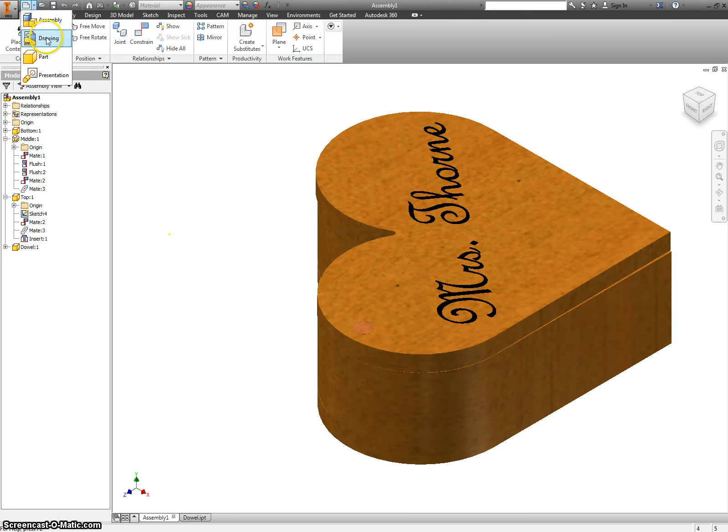Now that we have everything created and assembled, it's time to start making drawings so other people can replicate our work. So click on drawing, and for some reason this always comes in as C size, and no one has C size paper. They have 8.5 by 11 size pieces of paper. So if you right click sheet, edit sheet, 8.5 by 11 is actually A. So change it to A size, 8.5 by 11.

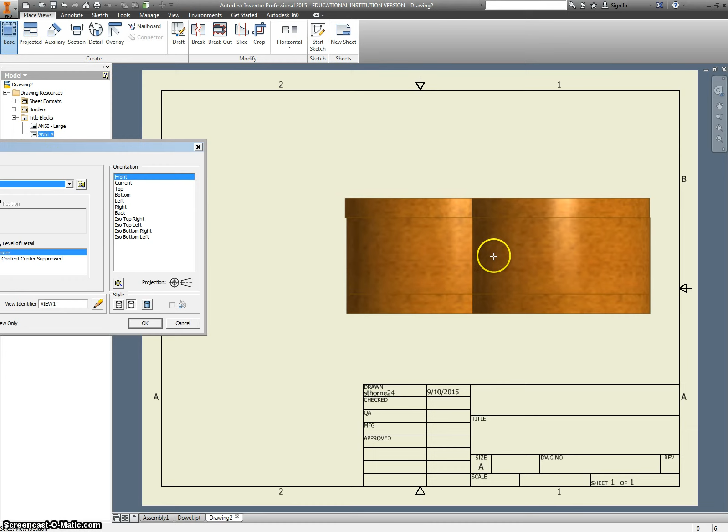Click OK. This is way too big, so we're going to change our ANSI large, delete it, and instead use for title blocks ANSI A. If you double click it, it'll pop in place. Now we're going to go up to base, and the base is going to be what view are we going to see in here. I'm going to go to our little folder, search for the top, click open, and if I just clicked right now, it would put it in place, but I don't want that.

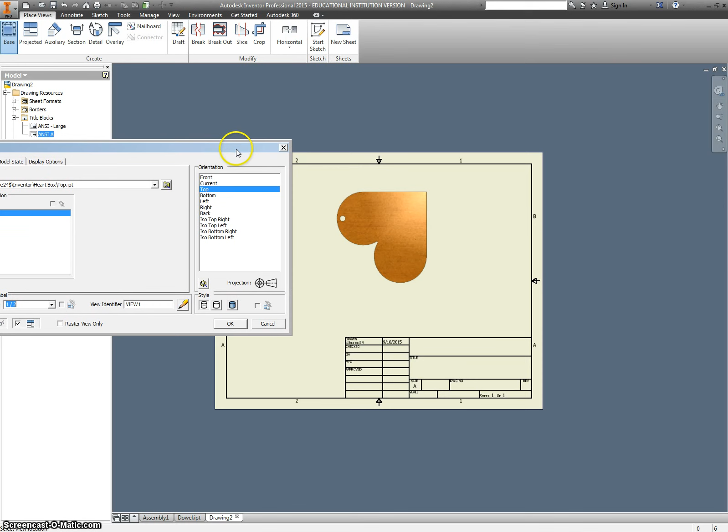So let me switch this to my top view so I can see what this looks like. And this is really big, so let's move this over and we can change the scale here. We'll make it half scale instead. And I don't really like that it's upside down like that. So I think what I'm going to do instead, I'm going to hit cancel. I'm going to go and open up my top view.

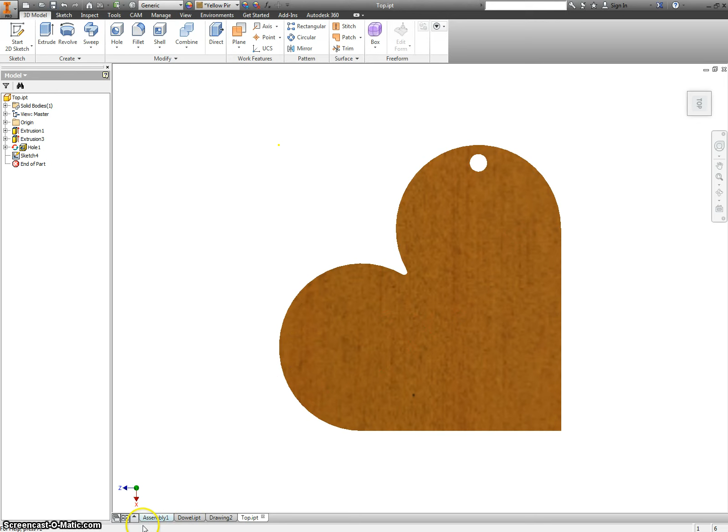And what do I actually want to see when I look at this? That seems the most appropriate, even though that's backwards from Mrs. Thorne. Let's save that. And when I go back into my drawing here, I have the option as my base to put in my current view and still change the scale down to half size. Okay, so there's that. There's the thickness. There's an isometric view so we can see what it should look like.

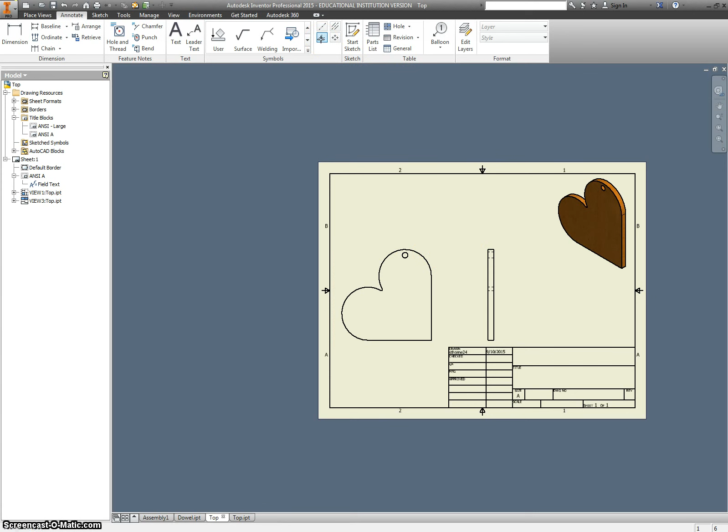We're going to make this one colored, so I'm going to add shading to it. And now we get to dimension this. When you go to dimension, it's under annotate. Annotations are any kind of notes you add to this to make it easier to read. We're going to add in center marks. Anytime you have something that looks like a circle or part of a circle like an arc, you want to put in a center mark. And we're also going to add regular dimensions.

So here is our radius, 1.76, 0.38. This is actually the same radius as this one, so we're going to do something special in a second. Ooh. Oh, you see how I clicked that little green dot? Don't click the dots. Instead, click the lines. When you click a dot, it's actually saying from this point to this point, I want to know that distance. We don't want that. Click when there is no dot.

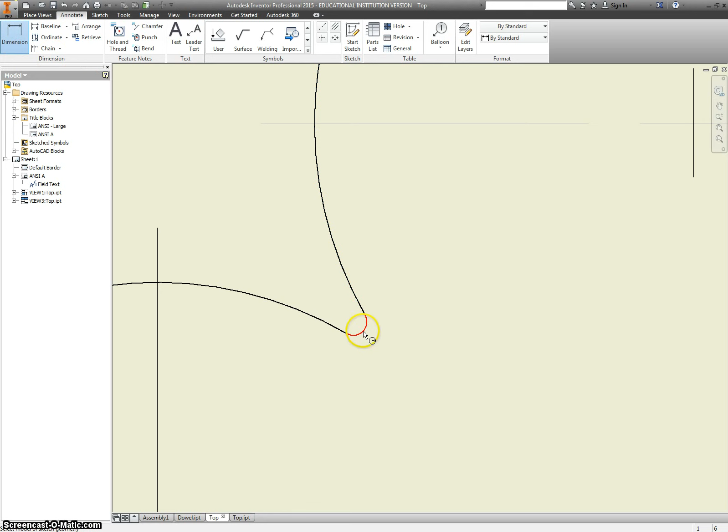Okay, these dimensions all look kind of funny. 0.38, 0.06, 1.76. This is not what we made originally. So right click on one of these dimensions and go to Edit Dimension Style. When this box pops up, we have the option to change the precision. We can change it to 3 places after the decimal instead of 2 places after, and this will make things make a lot more sense.

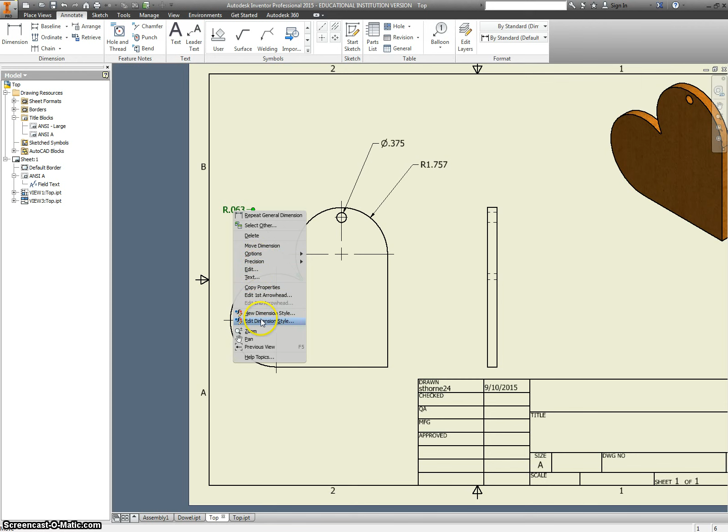So we never did set this radius, we just had a tangent constraint, but this 0.063 is actually 0.0625, so maybe we should go out one more. This is not saying that in woodworking you're going out to the thousandths and ten-thousandths of an inch. It's actually saying that this is a fraction. Okay, so 0.0625, that looks good.

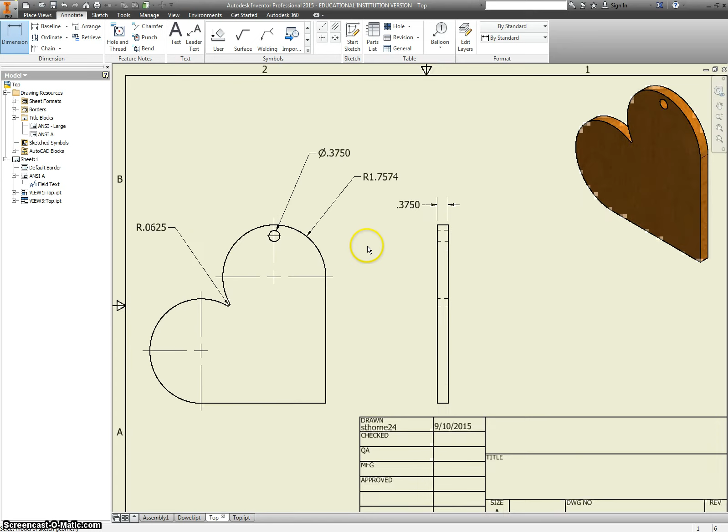0.375, that looks good. We need to know how thick this thing is, so dimension just that piece there. You can just click on the line as long as you don't get one of the little green dots. Again, that's so you can measure from this point to something else. You might want to know how far it is from this edge to this center mark, which is why we put the center mark in. So it's 5.625. Same thing from this edge to this center mark. And you want to kind of stair step them in, so your biggest ones are on the outside and they get smaller as they go in.

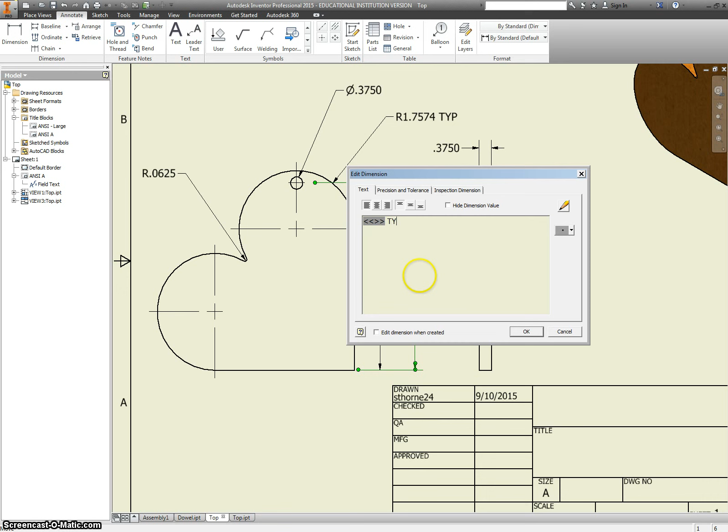Now, this is a symmetrical piece. So if we hit escape a couple times or right click and say OK, we can double click on one of these, like this one, and type TYP, stands for typical. Could also put times 2, but I think typical is more appropriate in this situation. I'll move these over a little bit. You want to try and keep these numbers out from inside here. This is bad practice. Put them on the outside of your shape.

Okay, this is everything we need for the top. So we're going to go up to Views, New Sheet, and everything we just had went away. It's actually right here. I'm going to rename Sheet 1 Top. I'm going to rename Sheet 2 Middle.

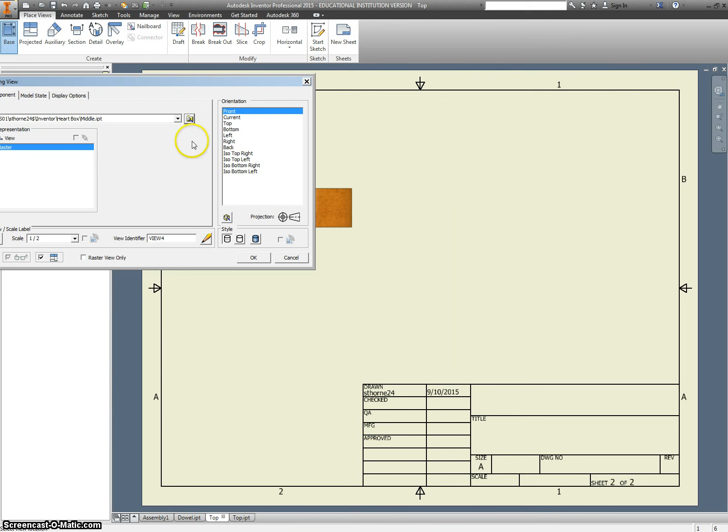The base for middle should be the middle. This is probably going to give us the same kind of issues as before. Should we care about that? Maybe not.

If you wish to rotate this around, now you know how. In the interest of saving time on the video, I'm not going to do that.

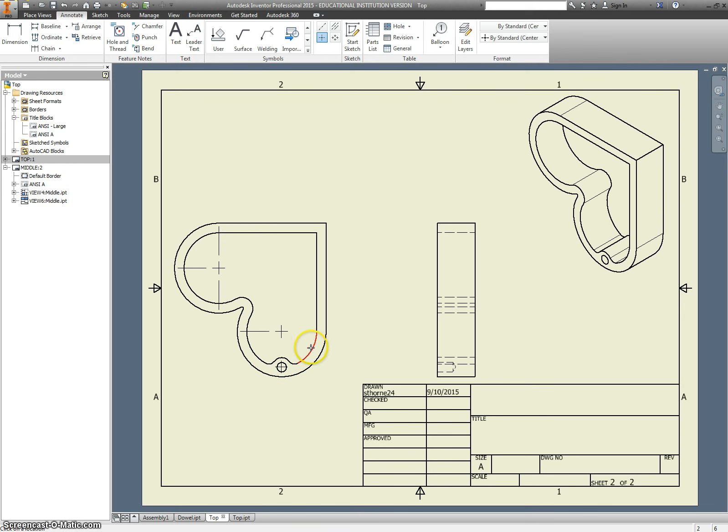We want to show where our center marks are. I'm going to click on both sides of this so I can get center marks all the way around. And this is a hole.

We have to do something special whenever we dimension holes. Instead of just dimension, you have one here labeled hole and thread. Click on that, click on the hole we made, and check that out. It has a depth of 0.625 here for you, and 0.375 is the diameter. This symbol means that from this edge to this edge, see the little circle, edge to edge, it's 0.375.

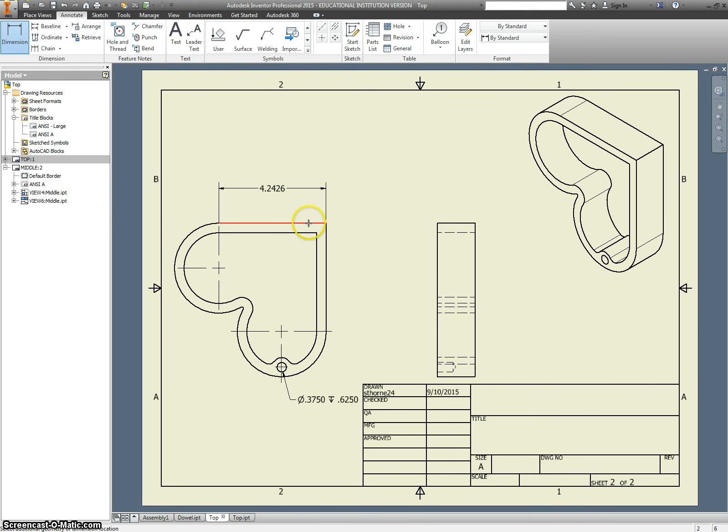Okay, these should look about the same as the ones we had before. This is 0.4 something, or 4 point something. Dimension from here to here is 5.625. We do have a thickness we didn't have before.

So I'm assuming this is my datum, and I'm measuring off of that 0.375. We want to show the thickness here is 1.5.

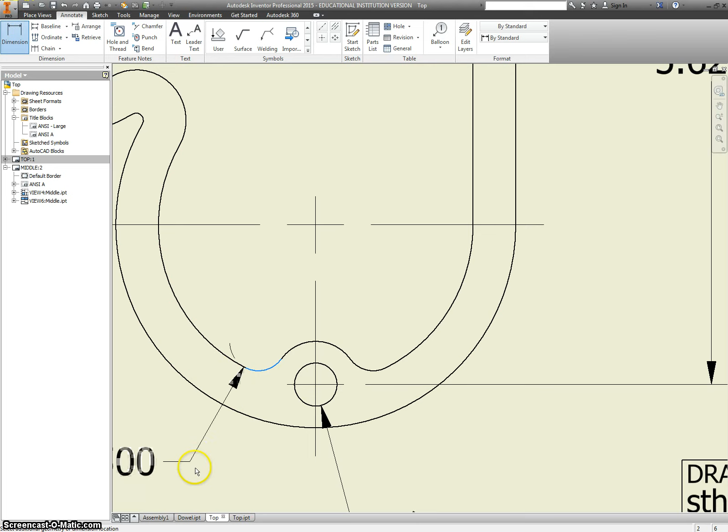And we also need to show what this little radius is here. I missed it, I clicked a green dot. Don't do that. There we go. 0.25 radius. This is the only one that's repeated.

So I'll double click it and say, how about times 2 this time? It means that you have one here and one here, 2 different places on the drawing is what times 2 would mean in this case. You're not multiplying this dimension by 2 ever.

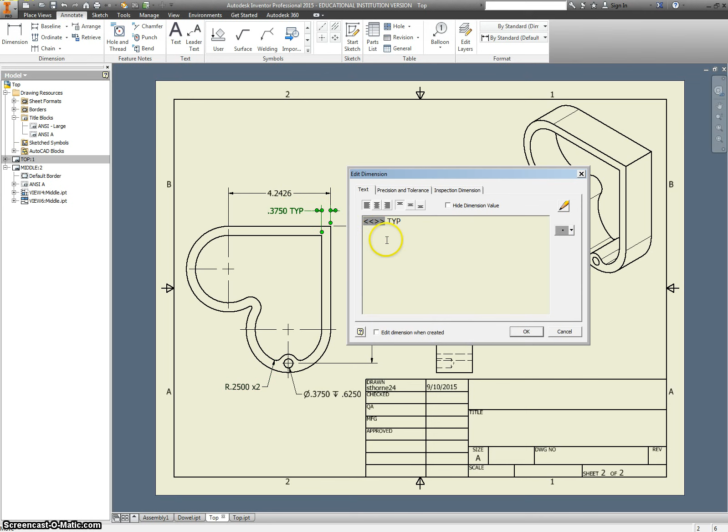This, I'm going to put a TYP after. So that means that the same thickness from here to here is all over the entire drawing. And it is, so that works.

Let me actually go back to the top one real quick. Did we mix something up? Yeah, there's not a hole on this side. So this TYP should not be there, should it?

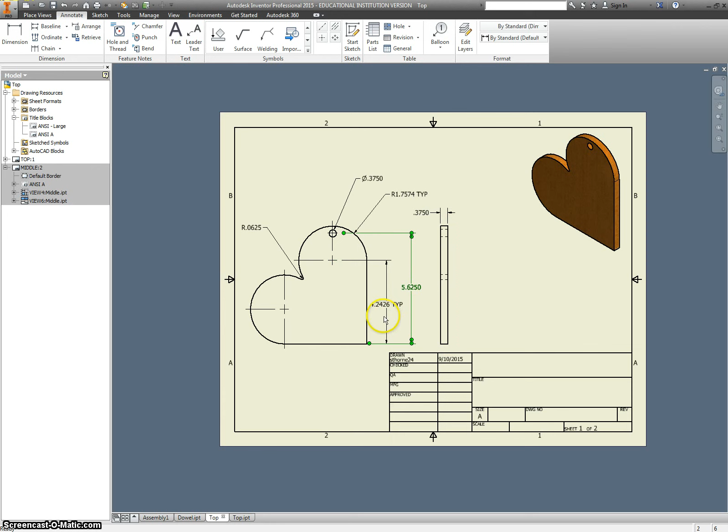That's only if it's a typical dimension. And the only typical thing is how far these are spaced apart. Back to middle.

We can also dimension the outside of this, which we did not have yet. And it's the same as the other ones. Ideally, this is a perfect shape. Double click on this thing on the top right.

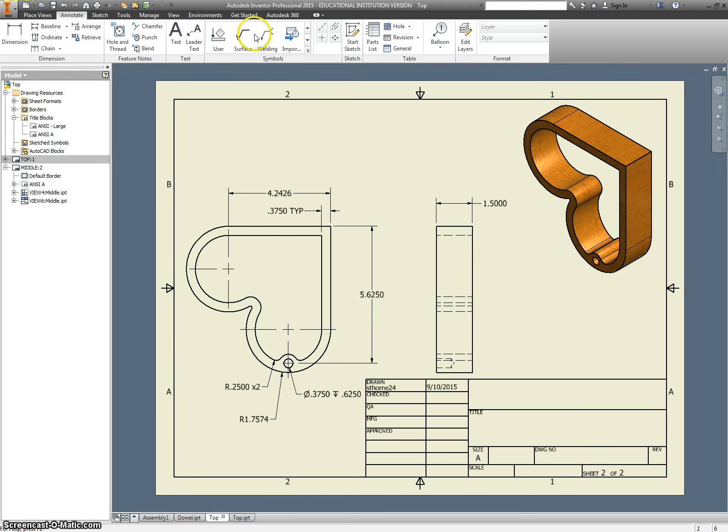Change this to a shaded drawing. And let's go on back to Place Views, New Sheet, and we're going to add in our last one. So Base, Search. Oh, not the last one, we still have a dowel rod to do.

We started with the top, so I guess we're going down to the bottom now.

Oh man, that got really close to that line, didn't it? To move this, you can't just grab and move it, it only moves left and right. You have to move the first one you put in, which in this case is this one here. I can drag that up, I can drag this over.

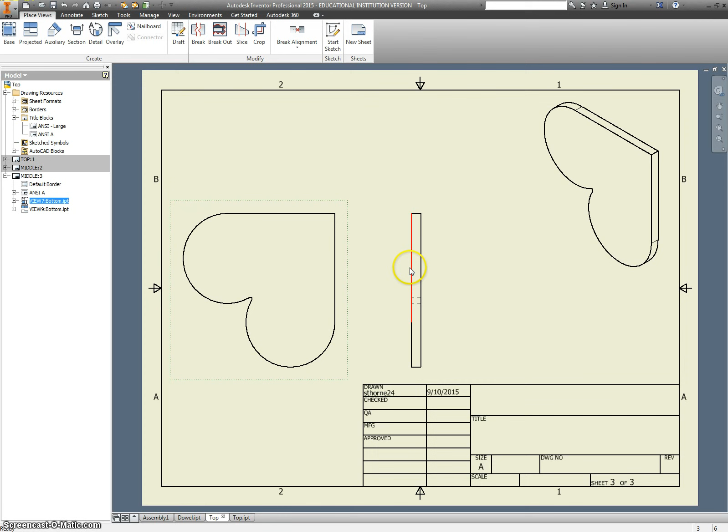These two drawings are always aligned with each other, so that's kind of nice. Double click this, make it shaded.

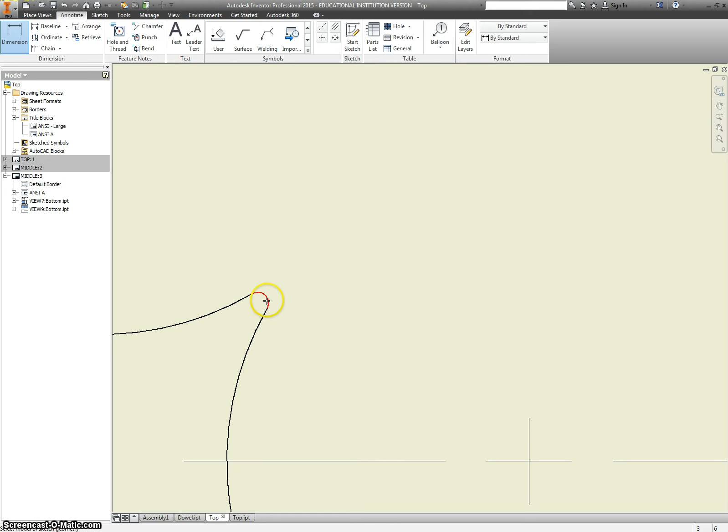Try not to have your dimensions go off the page. Actually, don't have your dimensions go off the page. Mark that again.

And if we want, we can click on the left and the right, and that'll still do the same thing as clicking the line in the middle.

This little hidden line here is just showing if we turn this on its side, that's where that cuts in. This would line up with that and over here somewhere.

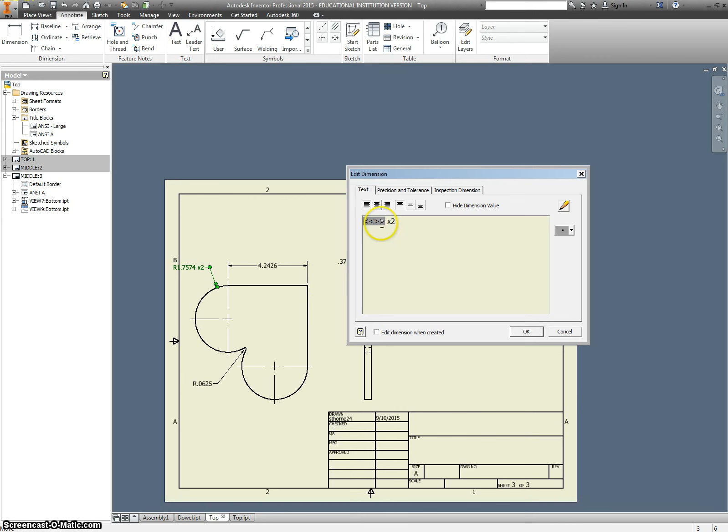We can have this be times 2, but it pushes it off the side, so I can hit enter and keep it underneath, and everything looks prettier. I can grab that little knuckle there and drag it over, and this can be a times 2 as well.

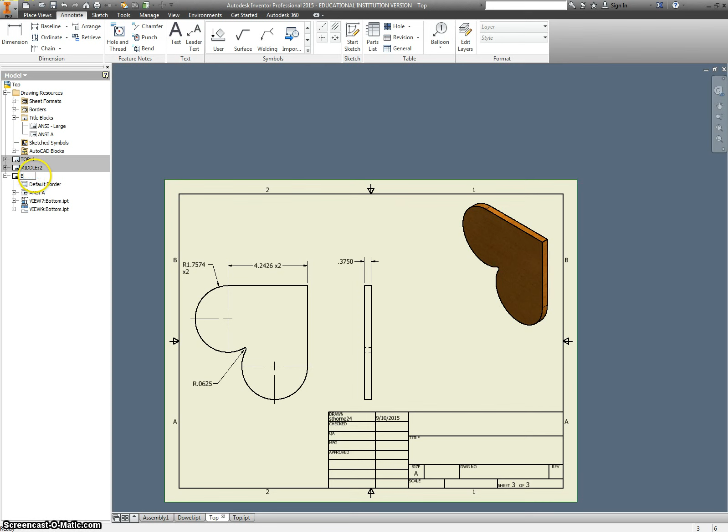Okay, we have the top, the middle. This is actually going to be called the bottom. Go back to place views, new sheet, last one, kind of.

Here's the dowel. That's huge. Let's have this be a 2:1 scale, so it's still big, but not that big.

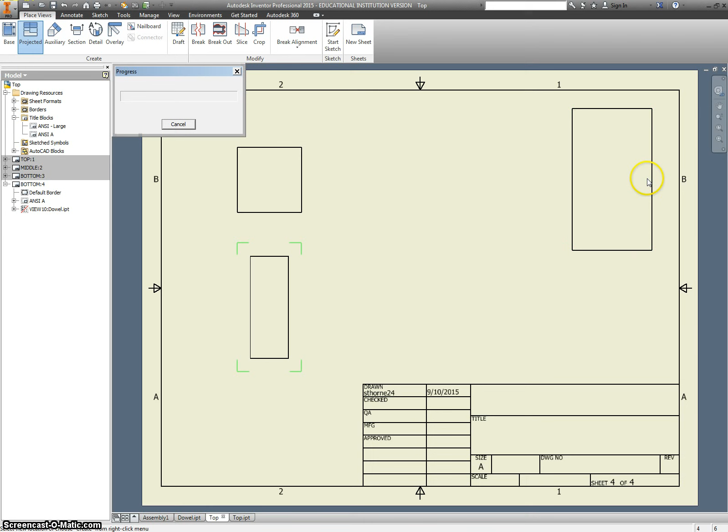Double click this one, make it shaded, dimension. There's our diameter, there's our length. We're going to make a center mark here, click OK.

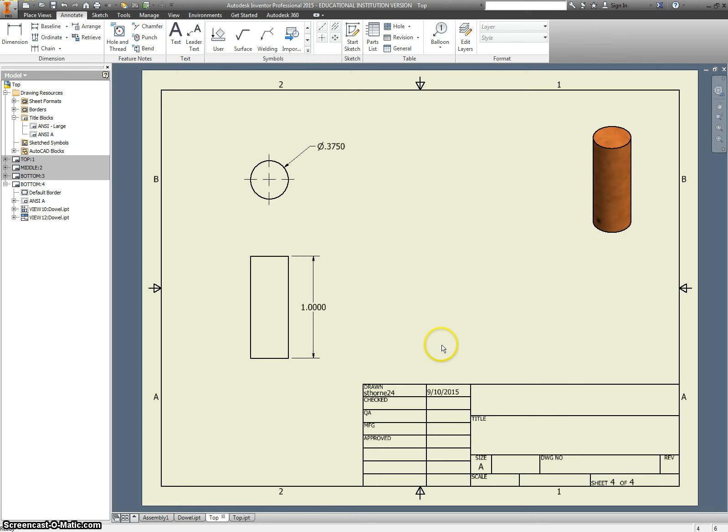We are still going to put in an assembly view and a parts list, bill of materials, but I don't have time in this video for that, so we're going to stop here. In the next video, I'll show you how to do some other stuff.